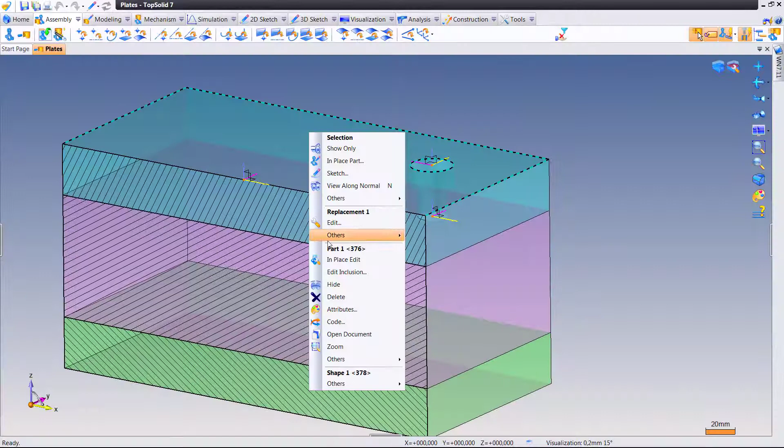New in TopSolid 2017 is the ability to add what we call in and out countersinkings to any TopSolid standard drilling. Here you can see I'm editing a countersunk hole.

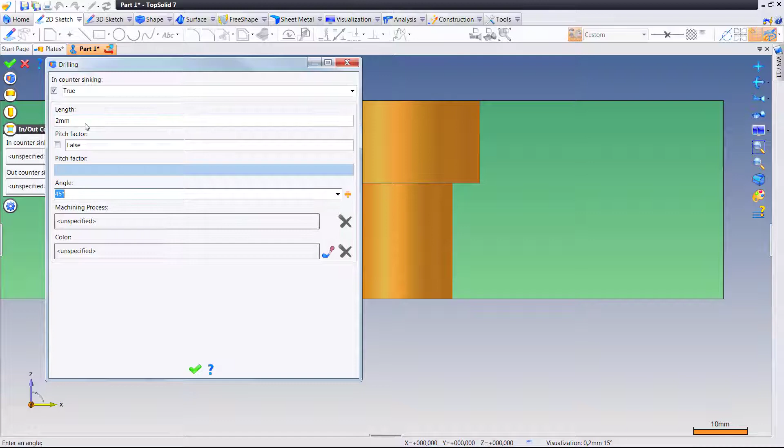There's a new portion in the dialog box where we can set the in countersink. So we'll set it to true, set the size we want, set the angle we want, click OK. And now dynamically you see where it put the countersink.

We can set the out countersink as well. Again, set the size, the angle, away you go. That's pretty simple, right? So we'll save that change and we'll head back to our assembly.

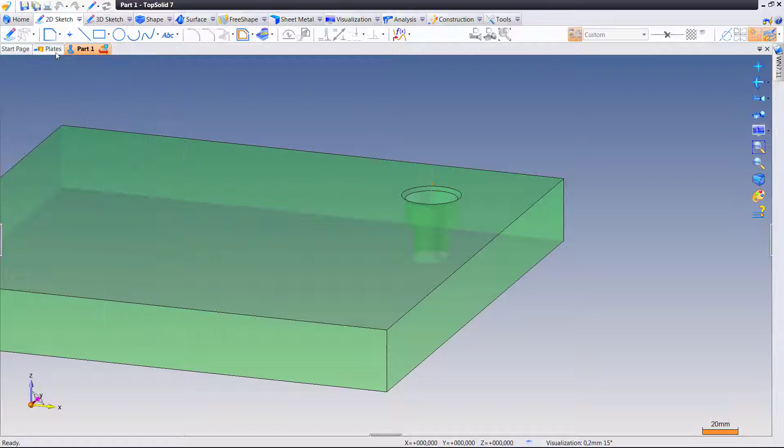This is the first sample. In the next sample, we're going to look at adding a tapped hole. So maybe we'll do that dynamically from within the assembly. Double click on my middle plate here and I'm going to do an in-place edit.

Here, I'm going to switch to tapping. I already have a frame where I want to put my drilling just to speed up my demonstration here. Perfect. And I'm going to look straight at this using the compass.

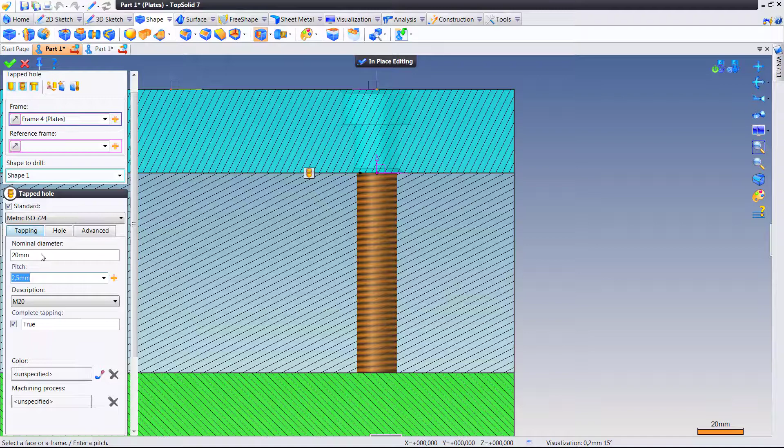And now we're going to set the countersinking rules. Now what's interesting here when we go to set the countersinking rules is we need to take into consideration the fact that we're actually putting threads on this hole. Because the hole being put in by TopSolid is the drill diameter, if you remember.

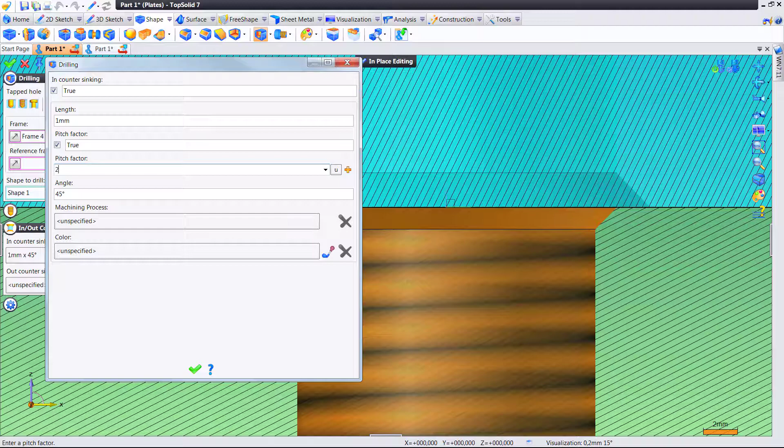So here I'm going to say I want to put in a chamfer. But I also want to take into account the fact that there is a pitch being used here. If I do a 1-to-1, you can see it's going to be close to whether countersinking is actually going to happen. But if I set my pitch factor to 2, it takes into consideration the pitch and doubles the size of our chamfer so that when we actually finish machining this hole, we're left with a chamfer.

Same thing on the through condition of this tapping. Again, pitch factor to 2, boom, done. We have countersinking on the top hole and on the bottom hole.

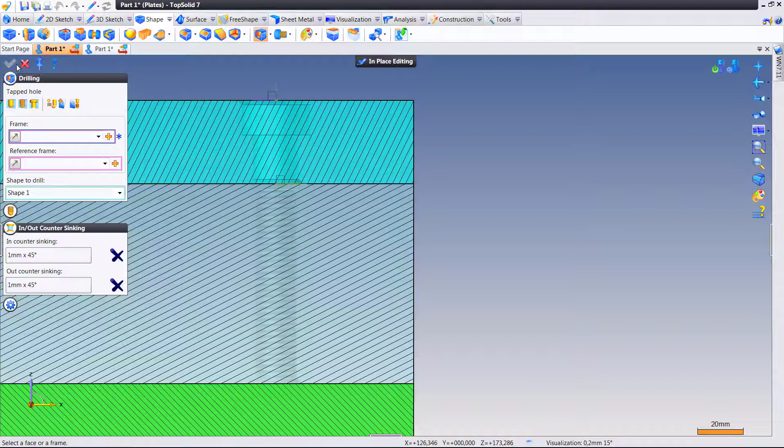Awesome. Now we're going to kick out of the in-place edit here and we're going to look at one more sample. In this sample, what we're going to do is we're going to add a drilling at the assembly level. I'm going to show you that this countersinking command even works here.

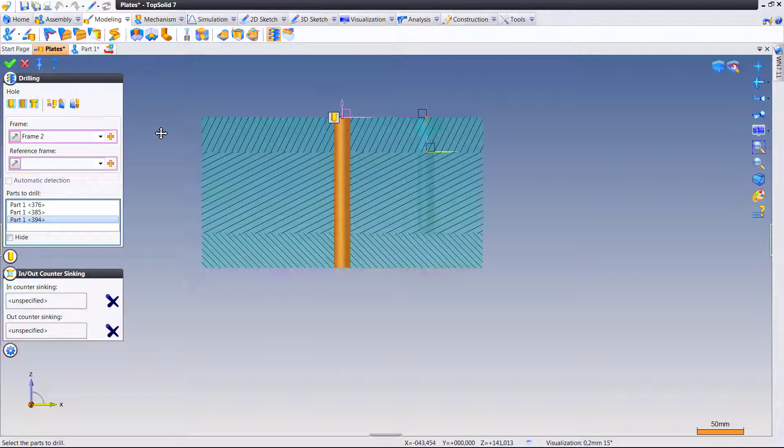So I'm going to put my drilling in at that frame. Again, the frame was pre-established to speed up my demonstration. I'm going to select the 3 plates that I want to add a drilling to, and I'm going to switch to just a simple standard drilling.

And here I'm going to set my in countersinking to whatever size I want, 2 millimeters, why not? And if you pay close attention, it's just put that on the start of every hole for each plate. 2 millimeters for the out, and now let's zoom up and have a look.

Wasn't that easy? You got the drilling the way you want, on the fly, ready to move on to the next detail.